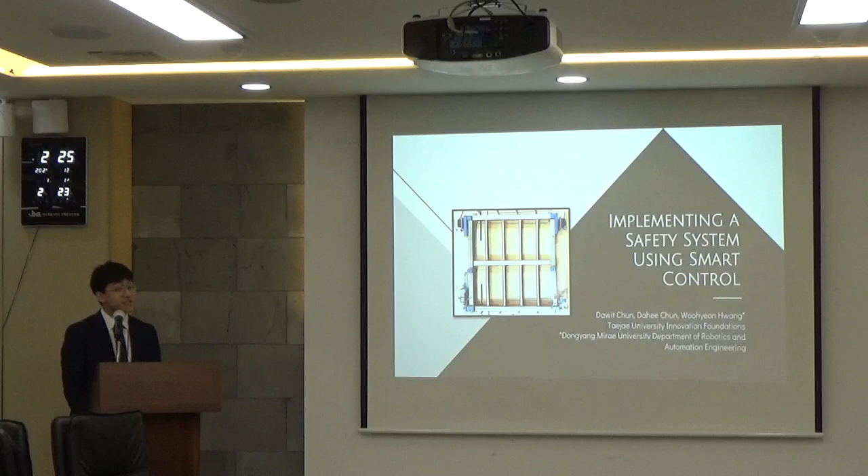Everyone, I'm today's presenter Dawit, and I'll be presenting about implementing a safety system using smart control. Here is my table of contents, and let me explain in detail.

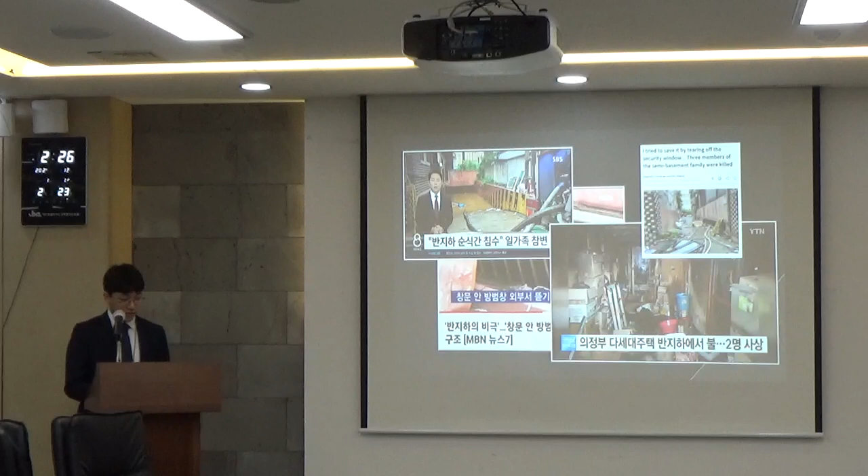According to news reports from last year, 2023, there have been numerous cases and traumatic experiences in which people who live in underground houses have passed away, unfortunately, due to flash floods or fires. And we think the main reason is a metal security window, called 방범창 in Korean. Although many security windows were used here, due to these examples they've been proved unhelpful or probably inconsiderate.

So many new designs have been coming up. For instance, Gwanak-gu has created a lock and alarm system security window in which the user needs to put in a key, open the lock and send the alarm just to escape. But that is the disadvantage: it takes too much time. In a very emergent situation such as an earthquake, tsunami, or fire, how can a person even rationally do that?

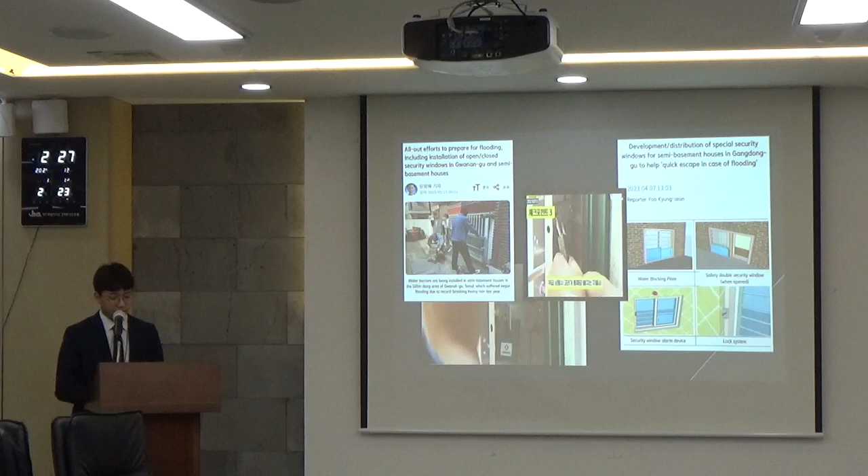So knowing that these new designs can still have flaws, our team decided to start this research to find a new security window design. First, we were very curious about how current engineers thought about this issue, so we did a patent analysis. But all these patents, even though they had an innovative or sound idea, had one flaw: it's difficult to escape. They all lacked some kind of automation system as well.

So they had ergonomic design mistakes, network mistakes, and connection mistakes that really prevented the escape of those people who were in the semi-basement houses. So we were very confused because they didn't work well.

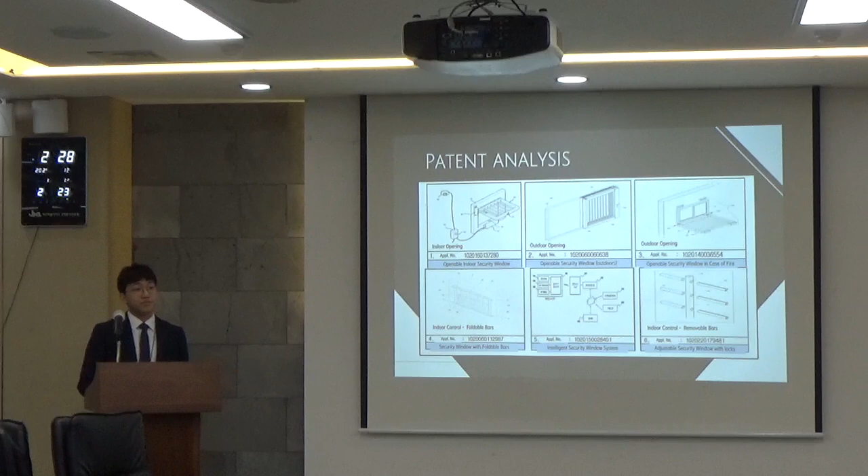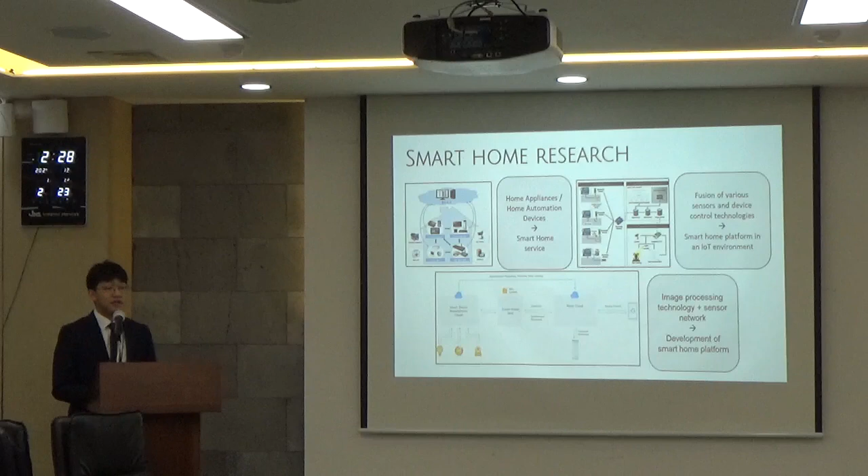But through much research, we found a trending topic and the new big deal, the smart home. A smart home is a fusion of various sensors and device control technologies that control the house's mechanisms. Furthermore, in the global smart home industry outlook, the trend has grown by 14.5% from last year. We believe we should use the smart home because we can connect it and use it as an automation system.

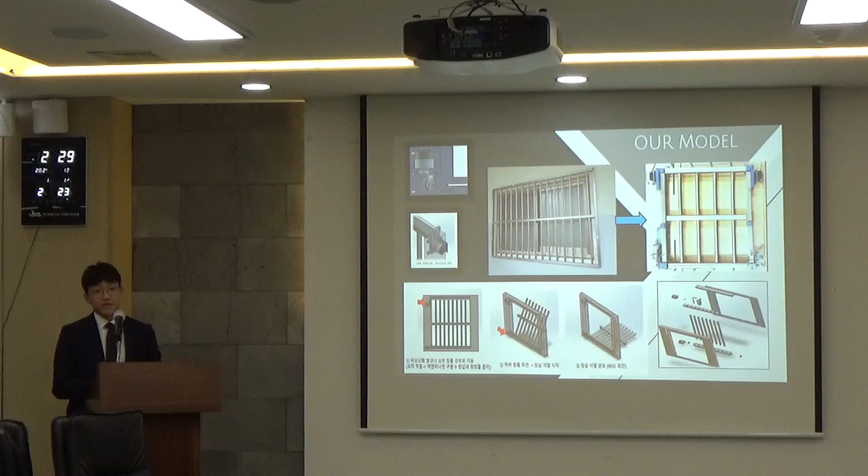So this is our model. As you can see in the top right, our design is pretty similar to the conventional security window, meaning it's going to have the same durability and strength as the original one. However, we tweak just two parts: the top part, which we will make go up, and the bottom part, to rotate the bars so that it can make space for the user to escape.

So let me explain. The conventional security windows are very tight. The top part is very tight; you can't do anything to release it. Our idea is to escape, so we need to let the bars down. In order to do so, we need to either remove, break, or completely destroy the top part. However, our team's idea was to move the red rectangle part up. So how?

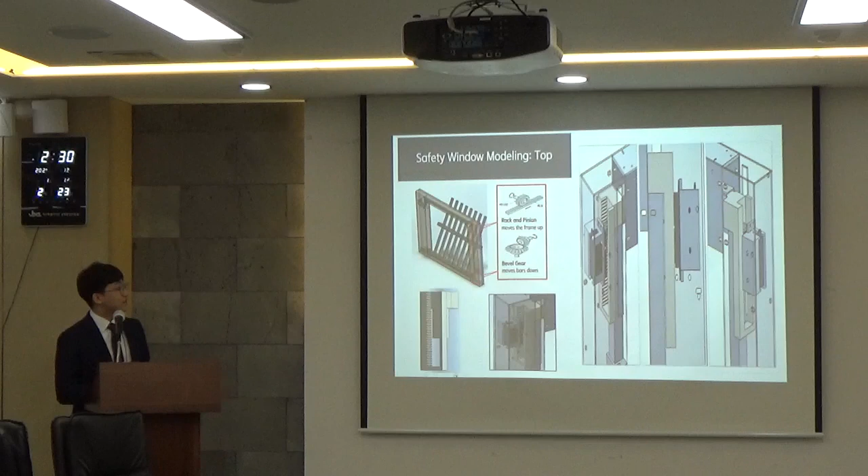We're going to use two parts. Number one is using a detachable attachment on the side of the top part, which is this, so it can move up very easily. The second is to use something called the rack and pinion, which is a gear, so that when the motor turns, the pinion turns by its strength. And since the rack is engaged with that pinion, it will move up by the intertwining mechanism of the teeth.

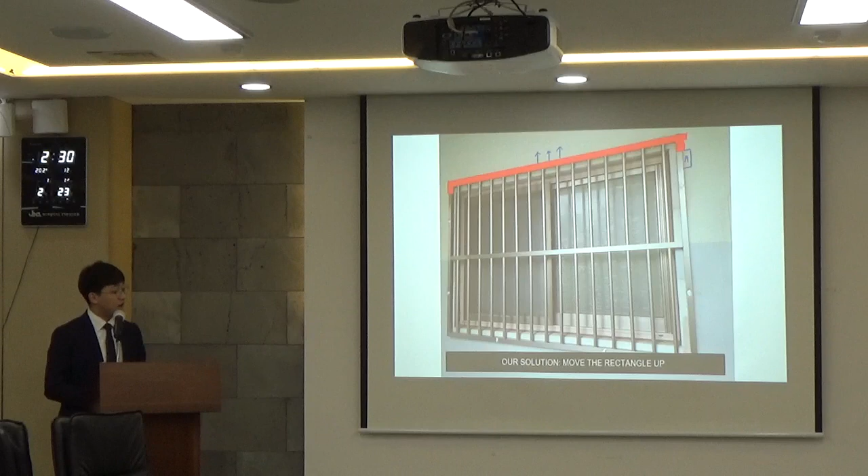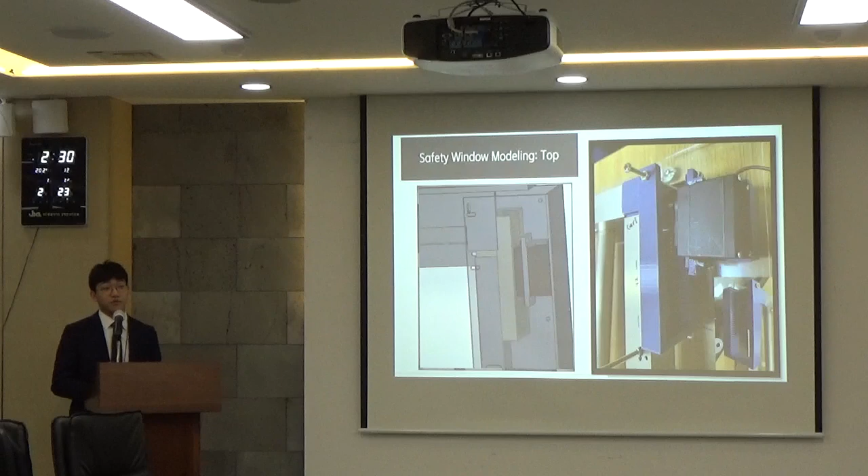So as I've explained, the new attachment will go up by the motor and the rack and pinion. We've also created it using 3D printers, and if you look at the left animation, the motor and the pinion will turn together, and because of the teeth intertwining mechanism, the attachment will go up and release from the window. So it's not the entire window, it's only the top part.

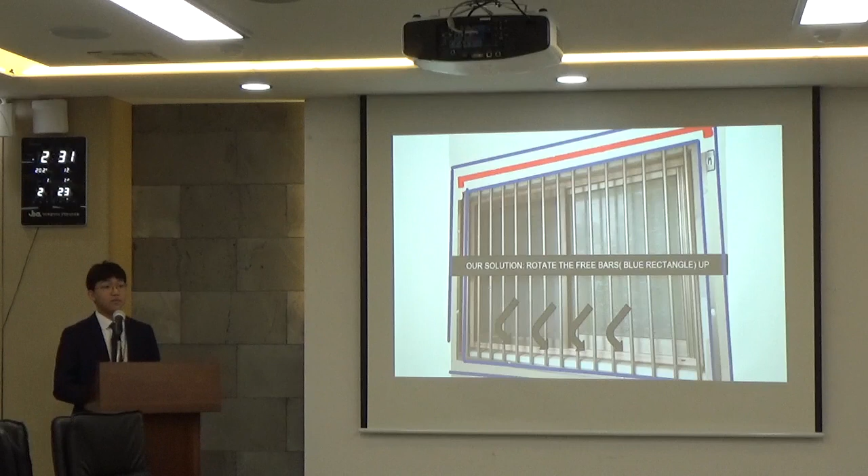Now that the top part is removed, the bars are just left there. In order to escape, you need to remove them by force, such as pushing or pulling. But our team's idea was to rotate the free bars down up to around 90 degrees. We did this by using bevel gears, which are gears that are perpendicular, so if one gear turns, the perpendicular gear can turn with the same strength as the motor.

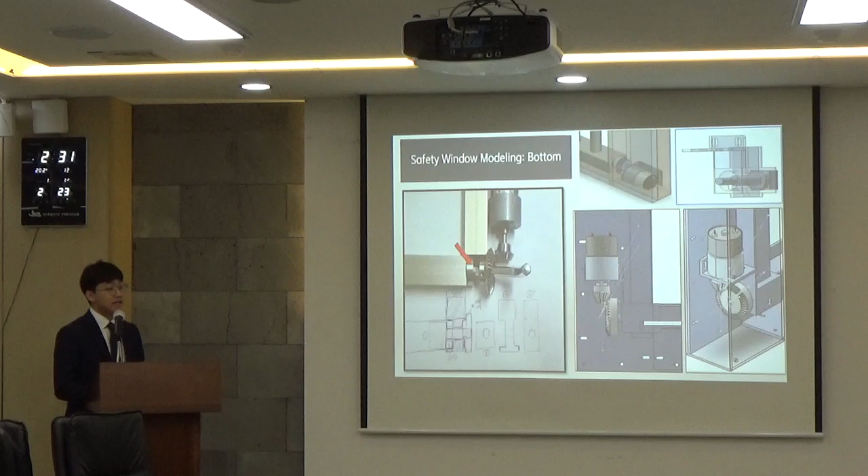So if the small bevel gear is attached to the motor, it will rotate the big bevel gear simultaneously, turning the bottom part together. And not only that, to keep everything fixed and stable, we also use a metal bearing in between.

So as the first part, we also created a 3D model of it and tried to test it out. On the right side, you see the animation. The motor turns the small bevel gear first with the strength of the motor, and simultaneously turns the big bevel gear, which turns the entire bar and the bottom part together up to over 90 degrees.

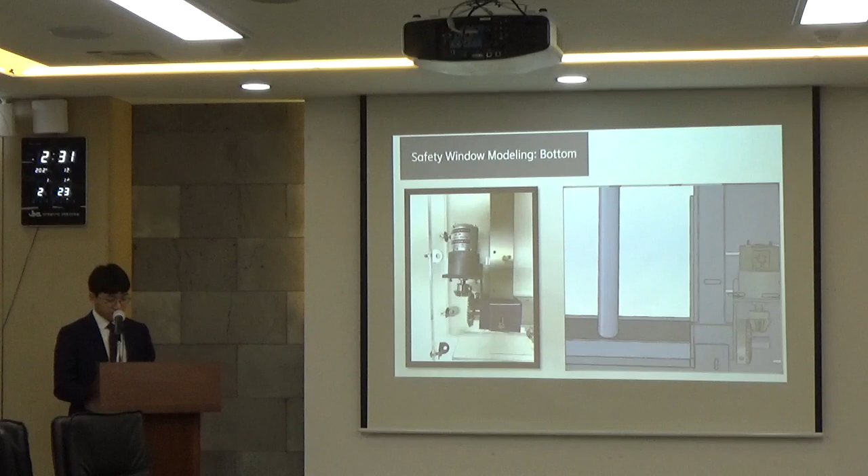However, there can be malfunctions as well, and even in dangerous situations like fires or flash floods, the electricity might cut off, or sometimes the controlling system may break down. So we made this manual opening switch, in which there are 2 verification steps. First, you push it straightforwardly, so horizontally, and then push up, so that the top part can manually go up. And because this is a pretty complicated design, only the person inside the house can open it, but people who are trying to break in from the outside cannot.

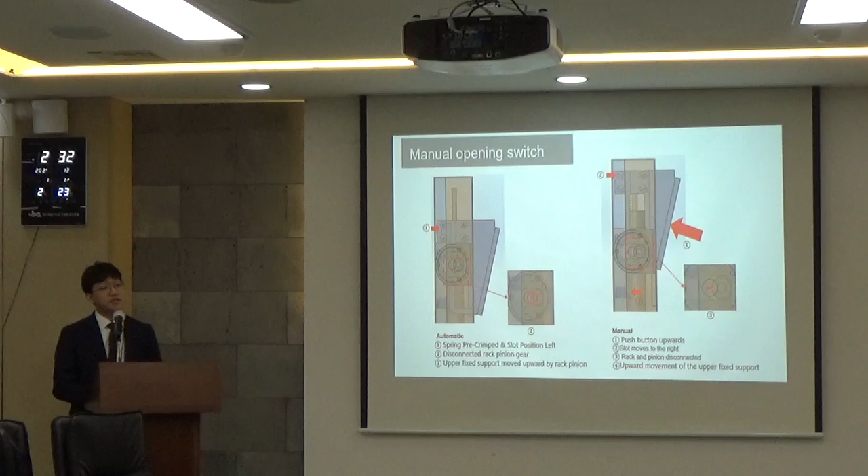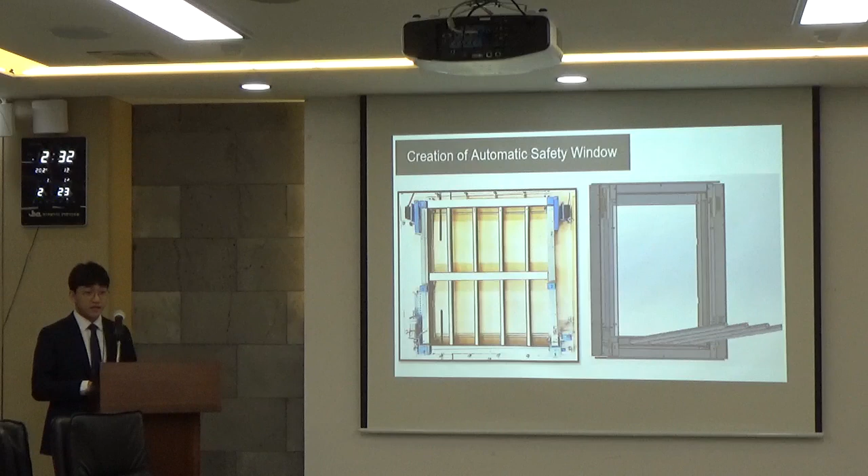So this is the overview of the creation of our automatic safety window. For the top part, we're going to use the rack and pinion to move up the top part. And for the bottom part, we're going to use bevel gears and the motors to rotate it so that it can come down. And the very main advantage of this design is that it can be reusable. Just by reversing the motors and the rack and pinion, it can go back to its normal state, which means you can reuse it again any single time.

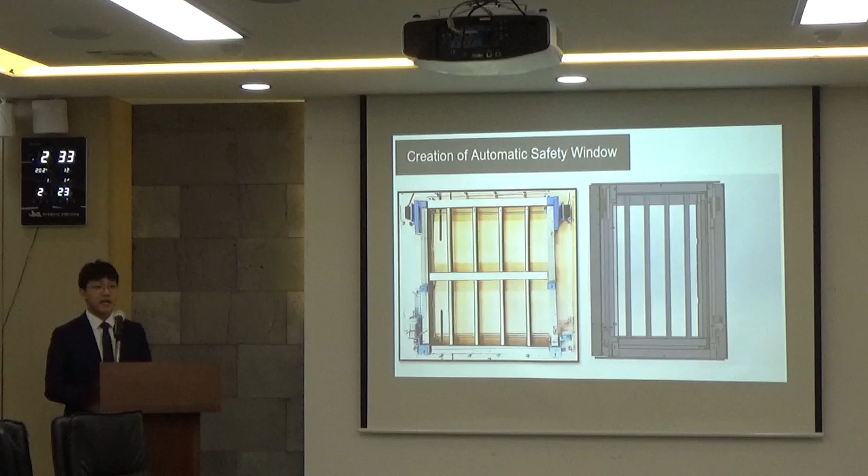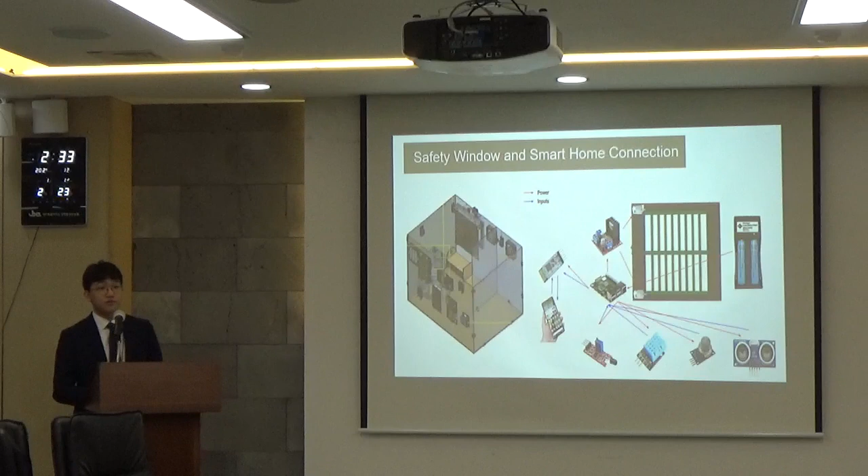Next, we have designed our smart home to test it together with the safety window, together with these sensors and IoT modules that include our phones and Bluetooth modules as well. Here is a summary of the flowchart of the smart system. We are going to take disaster alert data, weather data, and sensor data inside our house to analyze what's going on around and inside our house. Then it will send to the smart home and decide whether to open or close the window.

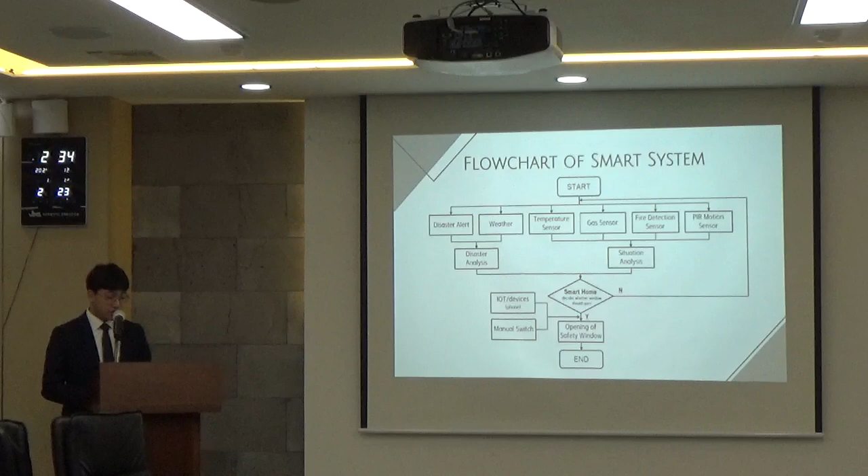But as I said again, there might be malfunctions or something unexpected, so we're going to use the manual switch or some additional IoT devices like smartphones or laptops to remotely open the window. However, there's another problem here. From the disaster alert, weather data, and all those sensor data, could we even accurately know and detect what's going on around the house? No, not really. So that is why we're going to use something together with artificial intelligence.

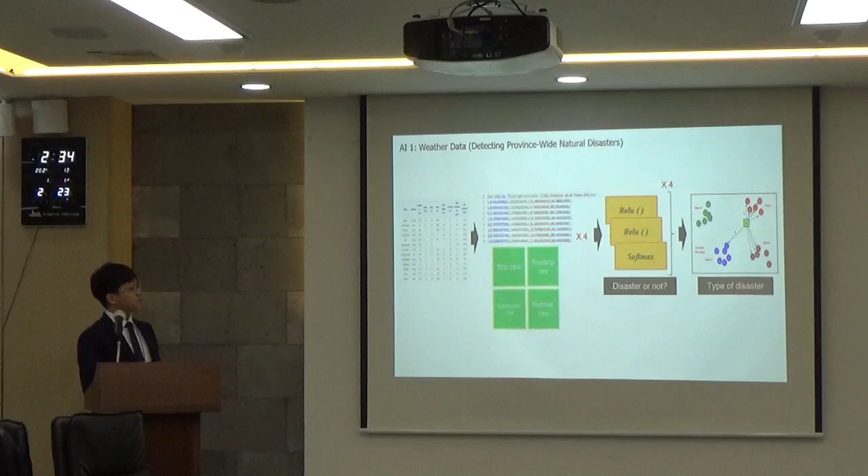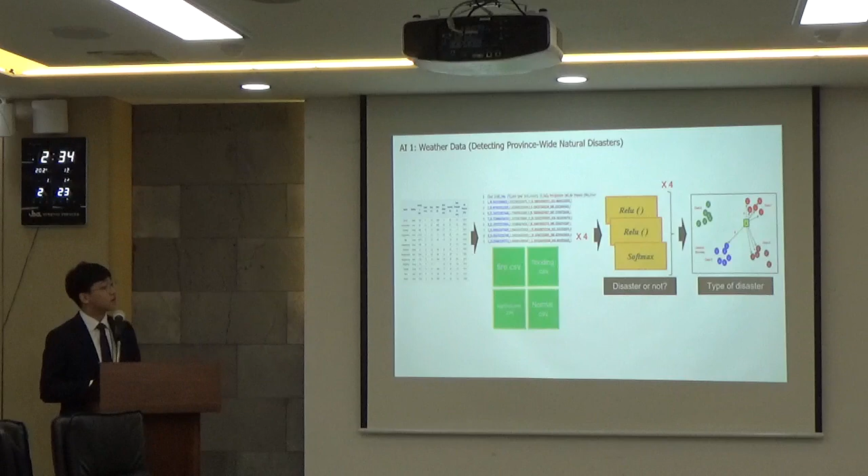Let me explain. The first AI is using the weather data to analyze it. So it's going to detect province-wide natural disasters. I got this data from the National Weather Data website, and from there I crawled the data and made it into CSVs for complementary situations like fire, flooding, earthquake, and normal. And using that, I trained the AI using ReLU activation and softmax. After it is trained, I will put an input to test if it's a disaster or not. And lastly, using the KNN algorithm, it's going to test what type of disaster it is as well.

The second uses the danger message data, detecting local natural disasters on a smaller scale. From the KBS danger message data, we will crawl the danger messages and compile them into a danger.csv. And using a BERT model, which is used for strings, we're going to extract the type of disaster and the address in the danger message. Next, we're going to use the Haversine formula, which involves input, and a magnitude finder to find the distance between my address and the danger message's address and the magnitude of the earthquake. And finally, using some more conditions for fire, earthquake, and flooding, we are going to choose to open or close the window.

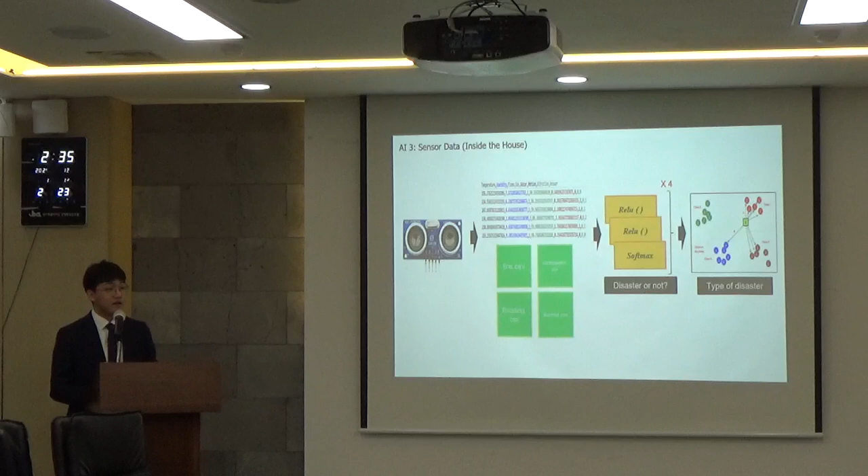So in conclusion, our research result has created a new insight that overcomes the problems of the patents in the past research papers. We have used the rack and pinion design for the upper part, and the bevel gears for the bottom part to work with automation. And lastly, we used AI together with the smart home system to accurately detect what's going on. And this was it for our research result.